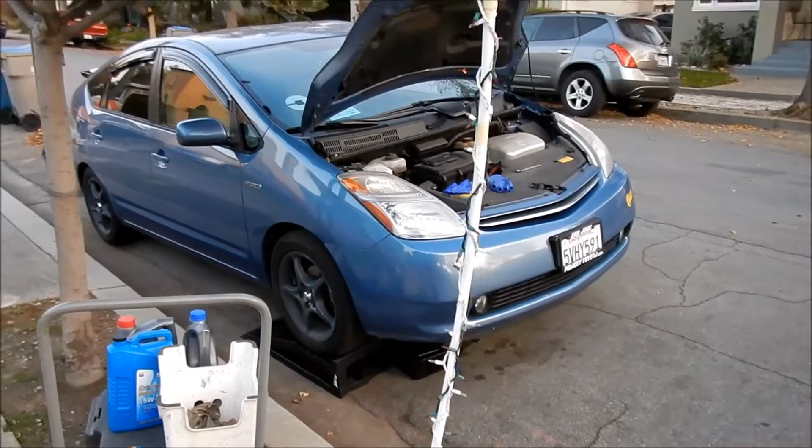Alright, HadesOmega here, and I'm doing a video on how to clean your K&N cabin filter. It's a little different than the air filter. The air filter is right there in the front, but I'll show you how to do it on the 2nd gen Prius right here. It's pretty much the same for all the cars, so long as you can get the filter out.

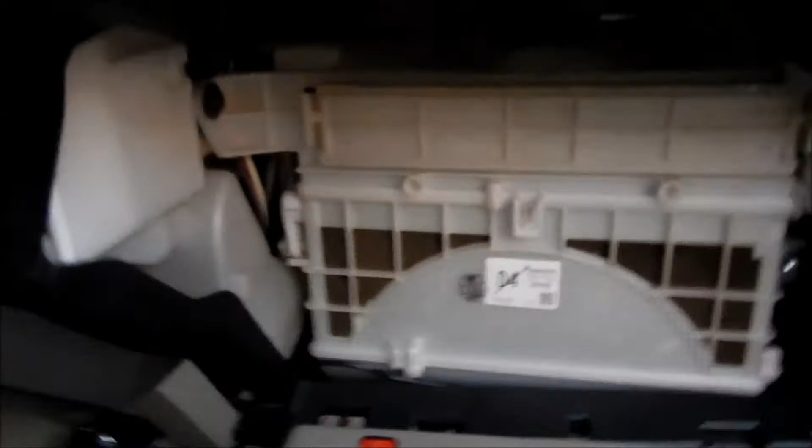So the first step is to take the filter out. Taking the cabin filter out on a Prius is quite easy. Just get on the passenger side, open the glove box, and there's some little tabs here. Squeeze the glove box inward, and then there's a little dampener rod, hard to see. You just pull that out, easy, and it comes out. You might want to take some of your stuff out of the glove box, like this big book here, and that gives you access to the little filter assembly.

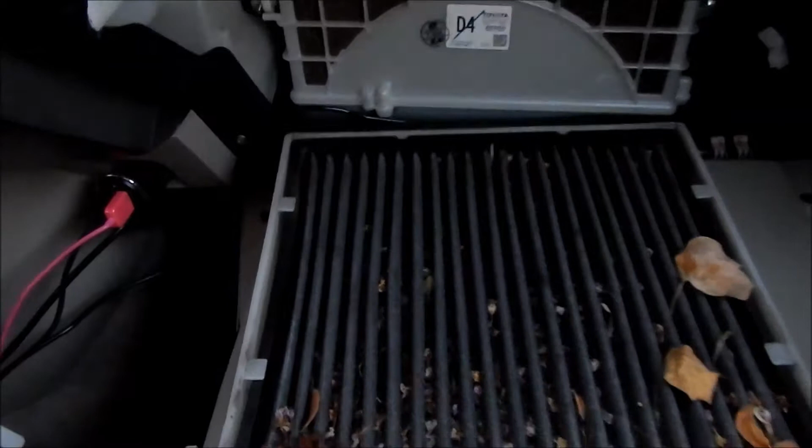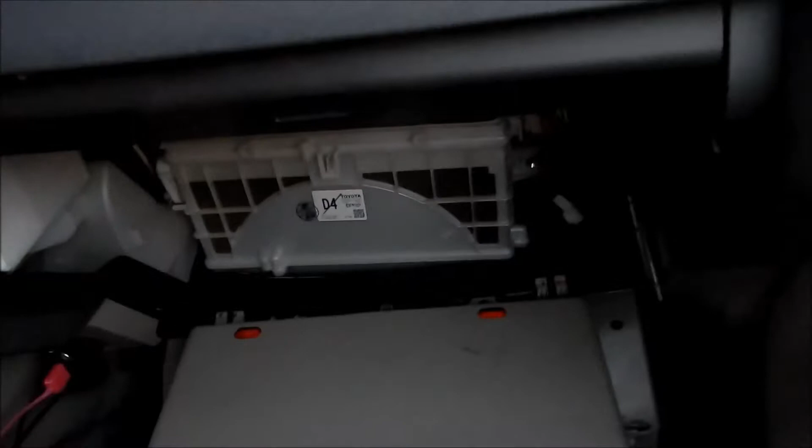So take it out and marvel at how dirty your cabin filter is. My car is parked on the street, and it's fall time right now, so there's a lot of leaves and stuff. Let me just go ahead and put this back up a little bit.

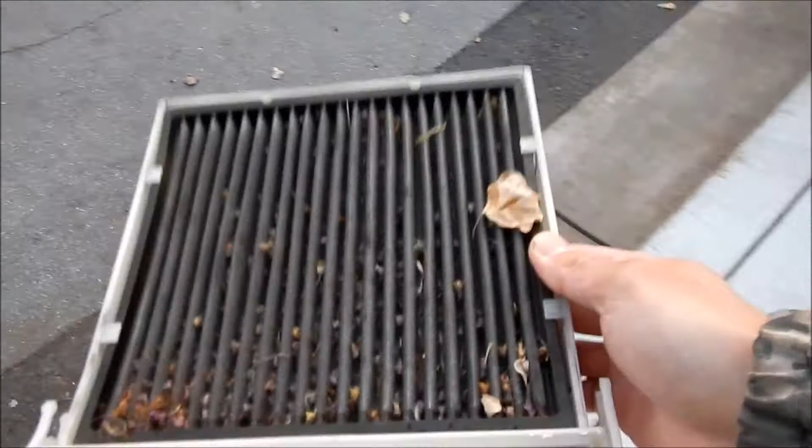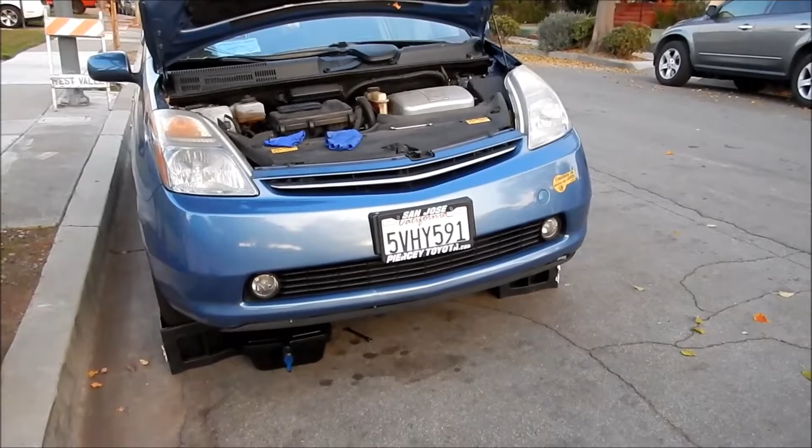Take your filter out. Alright, so what I've opted to do is, you should clean these every 10,000 miles, or inspect them every time you do your oil change. I change the oil every 5,000 miles on this car, so I do this every 2 oil changes. I'm going to clean the filter. As you can see, it's pretty filthy right now, pretty gross.

So what you want to do first in cleaning it is dislodge any foreign objects embedded into it, like these leaves and stuff. Let's put it on this pile of leaves here. A good thing to do when you get the big stuff out is to just tap it. Yeah, so you see how much stuff comes out of there? You're already doing a pretty good job cleaning it. It's just dust, so if you're in a garage you probably don't want to do that, but here in the open world, it can go wherever it wants.

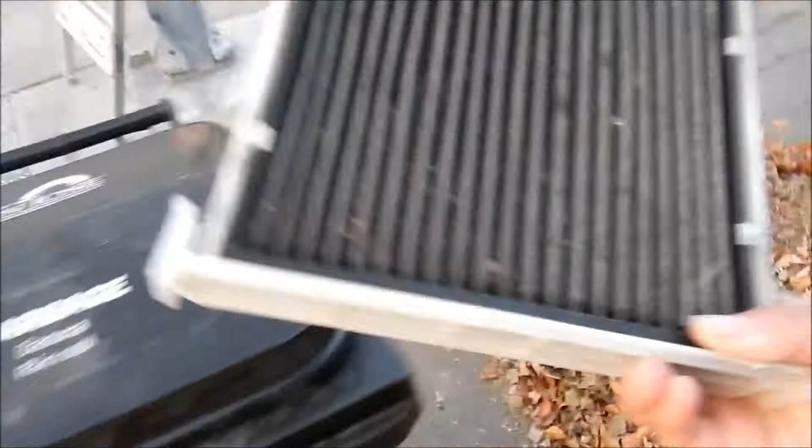Okay, so we got the majority of the dirt out. To take the filter out, you basically gotta squeeze the filter so it comes out from these tangs here. Like that. Boom, slide it out.

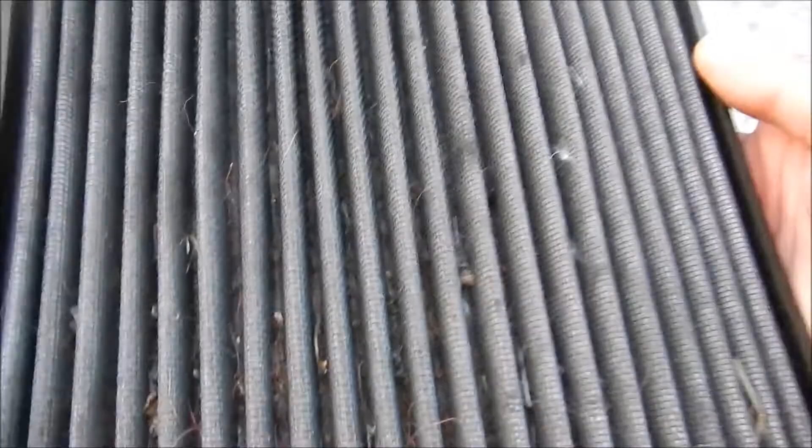You may want to take note which side is the part on top and the part on bottom. What I might do is get a silver pen, though obviously you can tell which side is top and bottom. The top part was the dirty part, so it's dirty on top, meaning the dirty air comes in from the top and goes to the bottom, gets sucked through the top, and the bottom part is clean. As you can see, the K&N filter has been doing a good job of filtering that stuff out, and I'm glad for that. I don't want to be inhaling all that crap.

So yeah, there it is. You've taken it out of the little tray. You may want to wipe the dust off of the tray - you can see some of it's getting around it. Just take note which one is the top and the bottom.

What I'm going to do is get a silver marker and mark it up somewhere. I'm pretty sure you can flip it around, and I think when you install it, it doesn't matter what side you do it, but figure out which one is the top and bottom so you install it the same way every time. But it doesn't really make much of a difference.

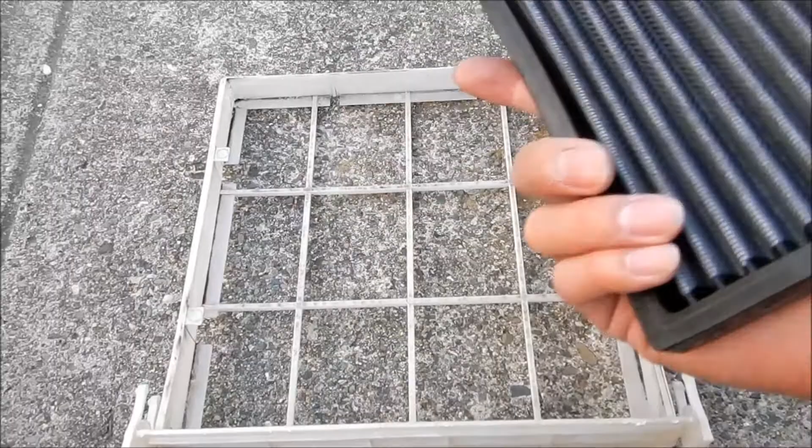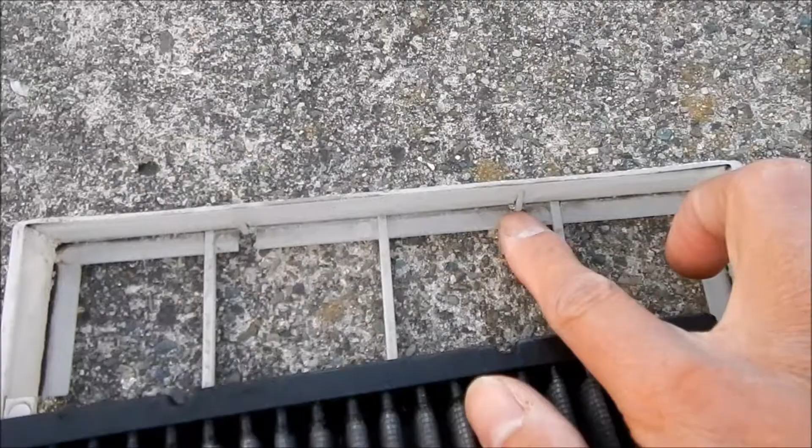But when you install it again, just take note of these little marks here, these indentations they made. They're made so they clear these here, so it's pretty dummy proof. You can't install this wrong as long as you match that up. So just go ahead and keep on banging that on something.

Get that dirt out. Just flop it around. Try not to hit it too hard, you may bend it.

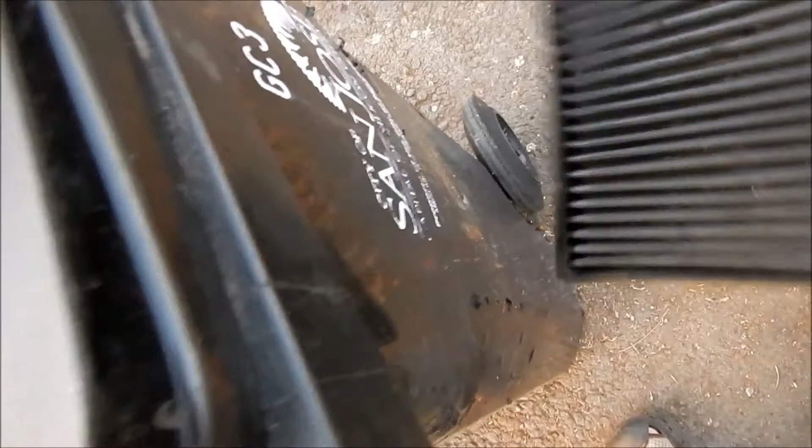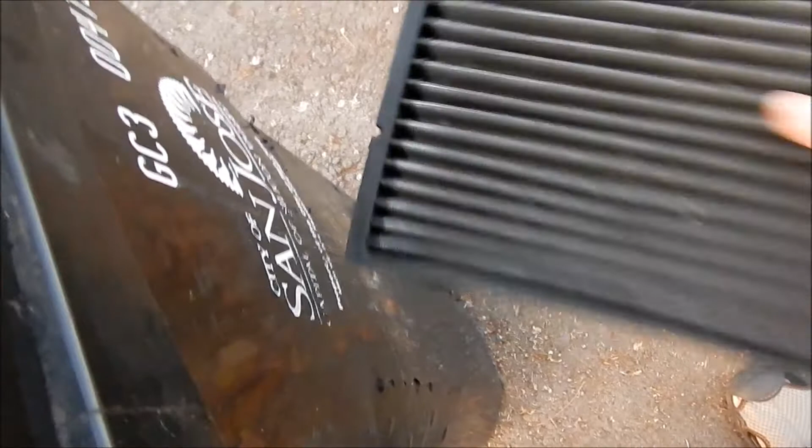That is really dirty, way dirtier than the air filter, I'll tell you that. We'll take a look at the air filter in a minute. So I've opted to clean the cabin filter at the same time I clean the air filter. That's a quick way to get some dirt off of it. And then we're gonna use the K&N.

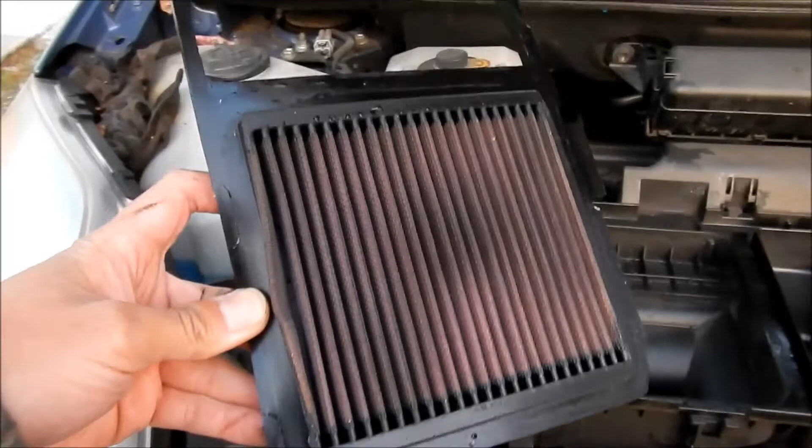I'll be cleaning this at the same time, but I have a K&N engine air filter, and you can see it's not nearly as dirty as this guy here. So yeah, that cabin filter needs a lot of attention.

Okay, HadesOmega here. I apologize, it's getting dark pretty fast. It's wintertime, so I'm trying to knock out the cleaning part before it gets too dark.

So here's the filter that we took out, and I did a pretty good job dislodging all the loose stuff in there. There's like a feather in here.

So here's the stuff that you use to clean it with. You don't use the regular K&N air filter cleaning stuff. There's an actual kit for the K&N cabin filter. It's called a refresher kit, washable cabin - it's a K&N refresher kit for washable cabin air filters. So there you go, this is a washable cabin air filter.

I got it on Amazon. I haven't seen these in any auto parts stores, so Amazon has them, and I think they were around 20 bucks. But I'll put a subtitle below right now with how much I paid for it. The price probably fluctuates.

So it looks like it's pretty easy. Basically, you spray on the cleaner, rinse the filter, and then apply the refresher. It's pretty much the same steps as cleaning the K&N air filter.

Yeah, so let's see what's in the box. The part number for this is pound 99-6000. It says it's a 10-year warranty and 100,000 miles. They stand by their products.

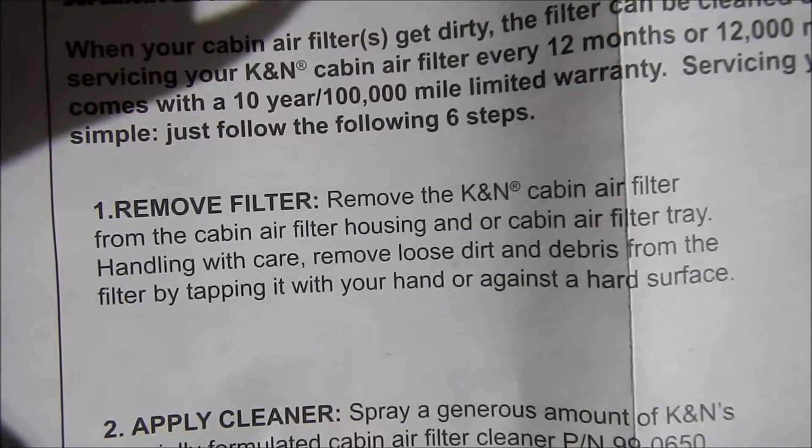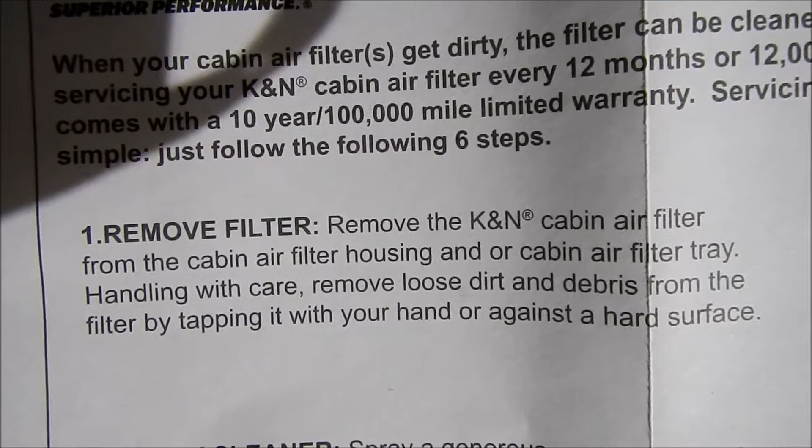The first step, which we already did, is to remove the K&N cabin air filter from the cabin air filter housing and/or cabin air filter tray. We've already done that. There it is. Handling with care, remove loose dirt and debris from the filter by tapping it with your hand or against a hard surface. I used the garbage can as the hard surface.

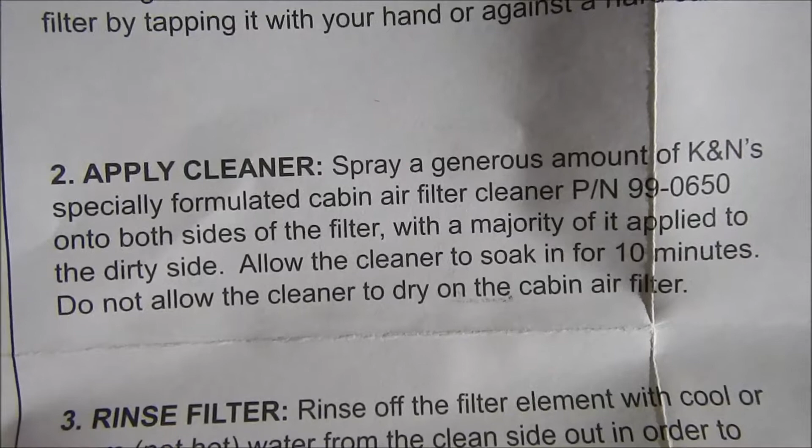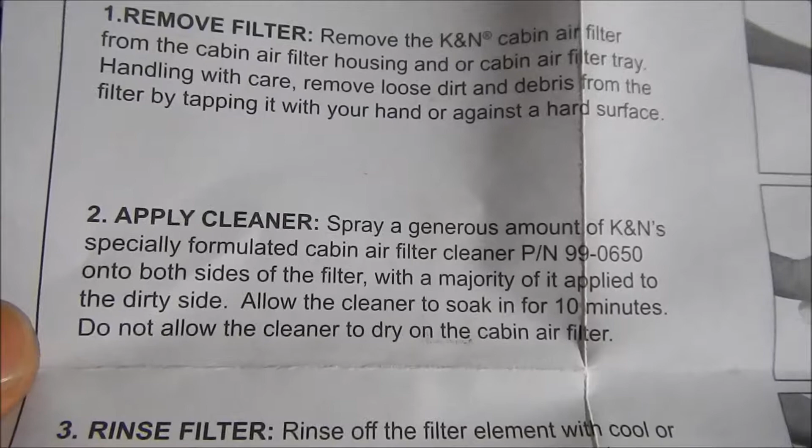Then we applied the cleaner. It's fairly clean now, so I don't think you need to clean it anymore. We spray a generous amount of K&N's specially formulated cabin air filter cleaner, part number 99-0650. It's good to know that part number in case you still have a lot of refresher left and just need to buy more cleaner once you run out. They say to use ample amounts, which is why the cleaner bottle is much bigger, onto both sides of the filter with a majority applied to the dirty side.

Allow the cleaner to soak in for 10 minutes. Do not allow the cleaner to dry on the cabin air filter.

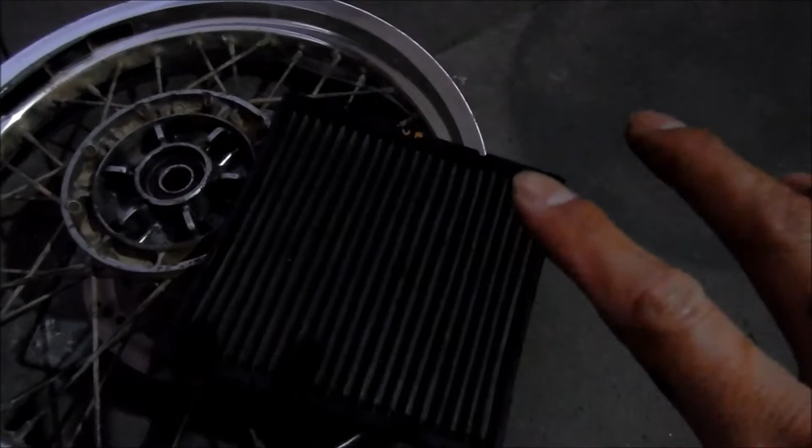So we're going to spray it. For demonstration purposes, I'm just going to leave it on this wheel here. This is actually what I use to dry my filters, an old motorcycle wheel. This one is all bent up and busted up, so it doesn't matter if it gets all messed up. So there's the filter, I laid it onto there. Let's get our cleaner, let me shake it a little bit. I don't think you have to, but it's probably just soap in the bottle. All right, and then just spray it.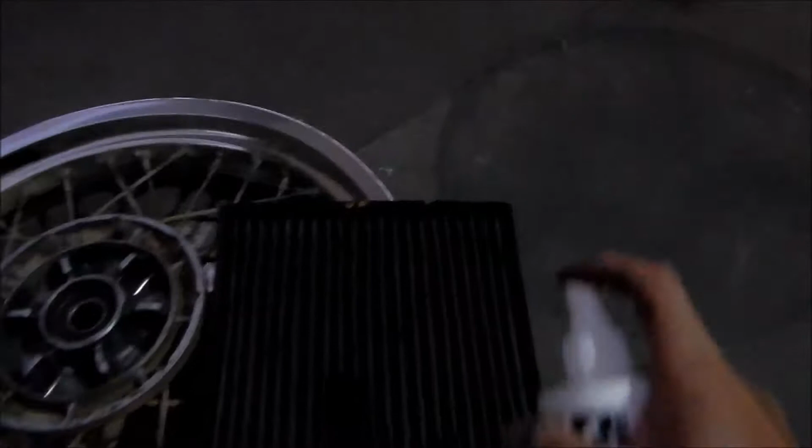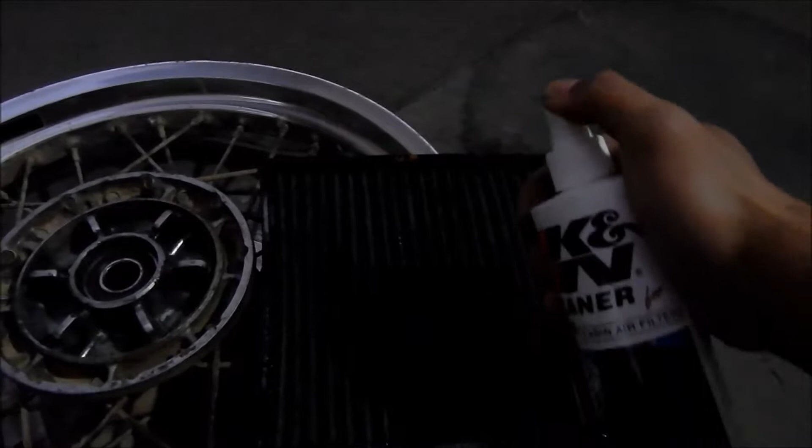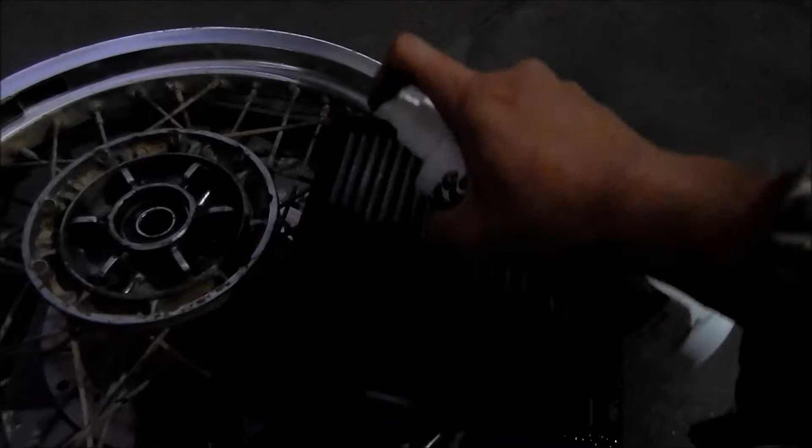They say the side that's dirty is the one you want to spray the most on. Just make sure you make it look wet. It's pretty cold today, so I don't think it will dry so fast. It's not very dry today. Okay, that looks like enough, and I'm going to turn it over and do the other side. Not so much on this side, just wet it. Make sure you get all the pleats and everything. Just go through it in a little methodical pattern. The spray bottle is kind of hard to use. Okay, and then just leave it there for 10 minutes.

It's 17:10 right now, so at 17:20 we'll come back and rinse it.

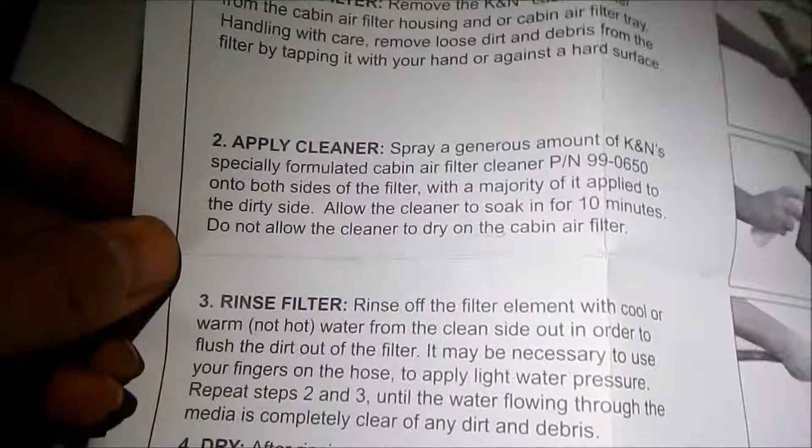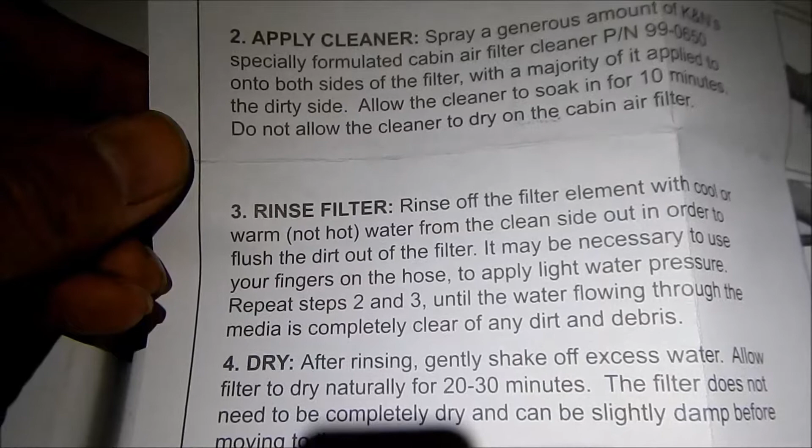Okay, so we're on step 3, rinse filter. Rinse off the filter element with cool or warm, not hot, water from the clean side out, in order to flush the dirt out of the filter. So you flush it from the clean side to the dirty side. It may be necessary to use your fingers on the hose to apply light water pressure. Repeat steps 2 and 3 until the water flowing through the media is completely clear of any dirt and debris.

Okay, it's been 10 minutes, so it's time to go rinse it. We're going to get a garden hose and spray it. What you want to do first is spray it from the clean side to the dirty side first, that way it forces the dirt out the dirty side. So here we go.

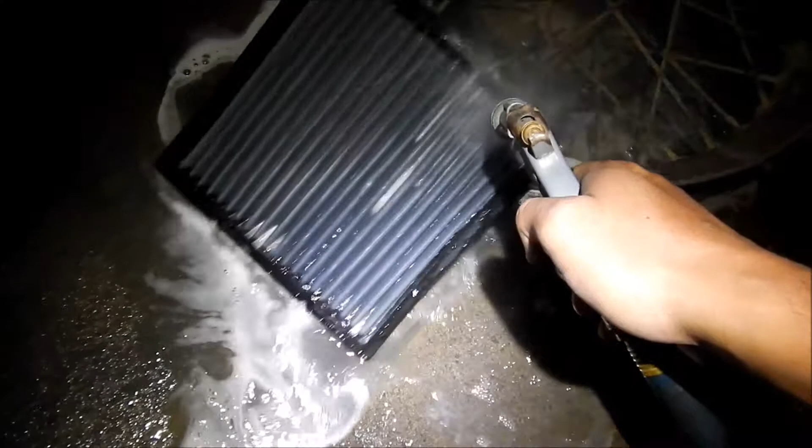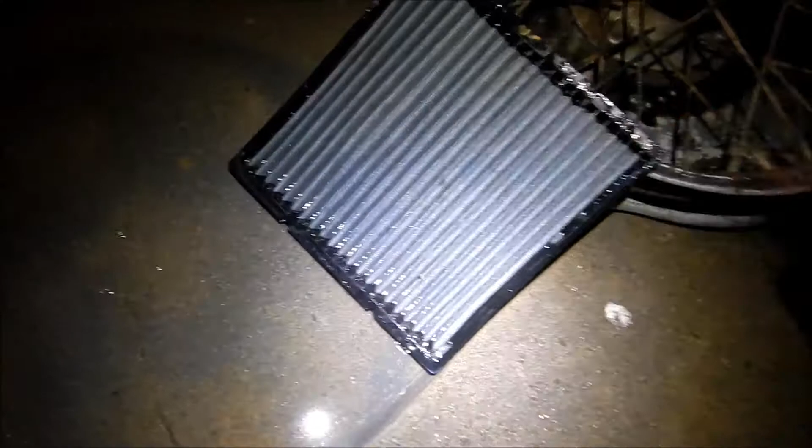Okay, flip it over and marvel at how clean it is now. It's still a little dirty, but let's keep on doing it. Keep on rinsing it if it still looks dirty. Try to really get into the pleats and let the water pressure do the work.

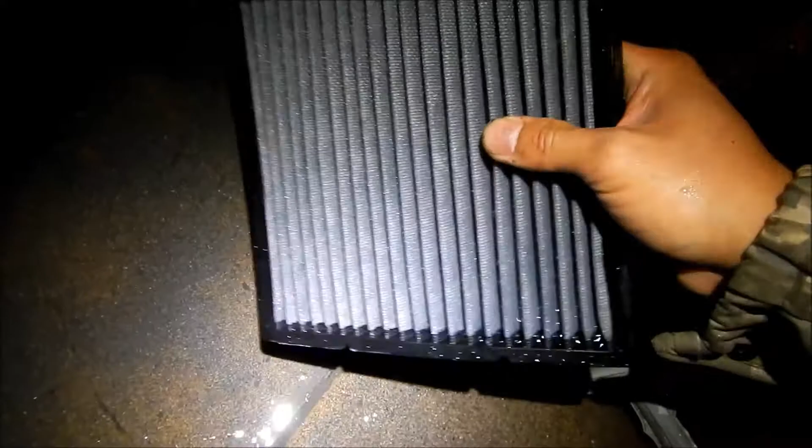There it is, looks pretty clean. So all we have to do is rinse this side one more time. And look at that—remember how dirty it was before? It's not so dirty anymore.

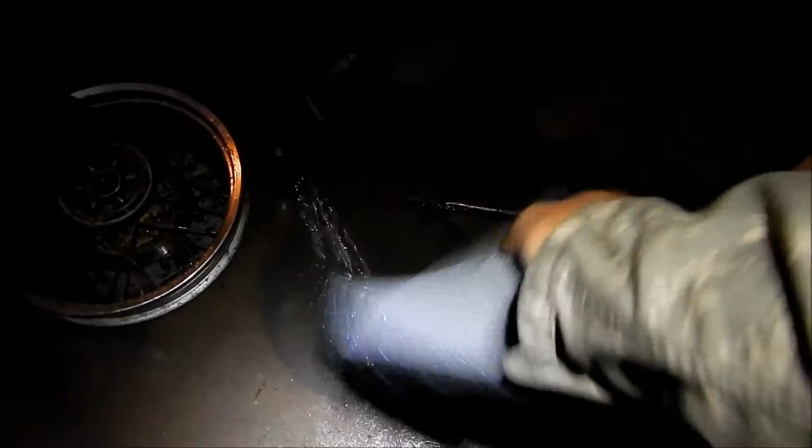It's brand new. Now all you have to do is dry it. Just shake off as much of the water as you can. What I don't like about cleaning these K&N filters is that you can't drive your car for the rest of the day—you have to wait for this to dry. The best way to dry these, I think, is to just leave it in the car on a hot day and it'll dry right away.

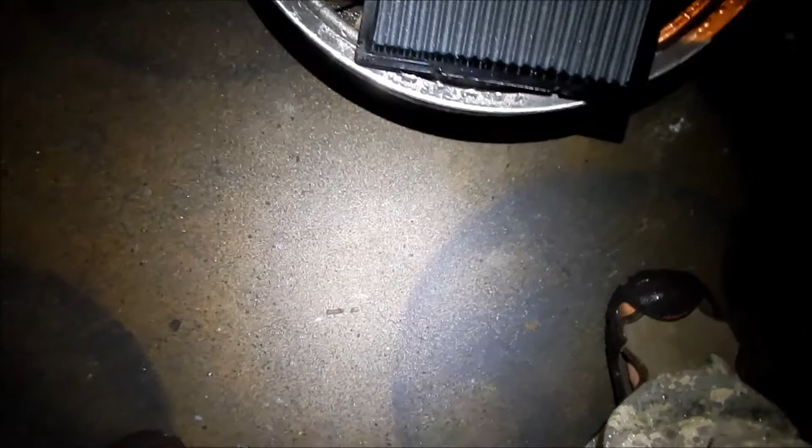But you should really let it naturally air dry. That's what I like to do—tap all the water off, then leave it on this wheel here to dry. I'm probably just gonna leave it overnight, not drive the car the rest of the day. Then I can clean my air filter.

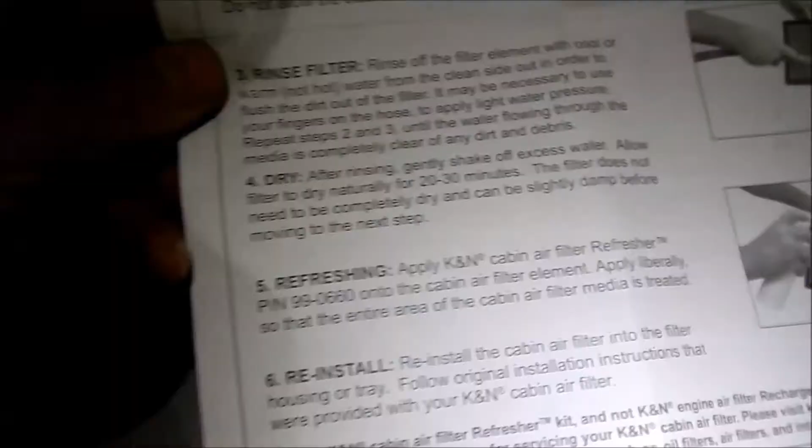Okay, step 4: dry. After rinsing, gently shake off excess water. Allow the filter to dry naturally for 20 to 30 minutes. The filter does not need to be completely dry and can be slightly damp before moving to the next step.

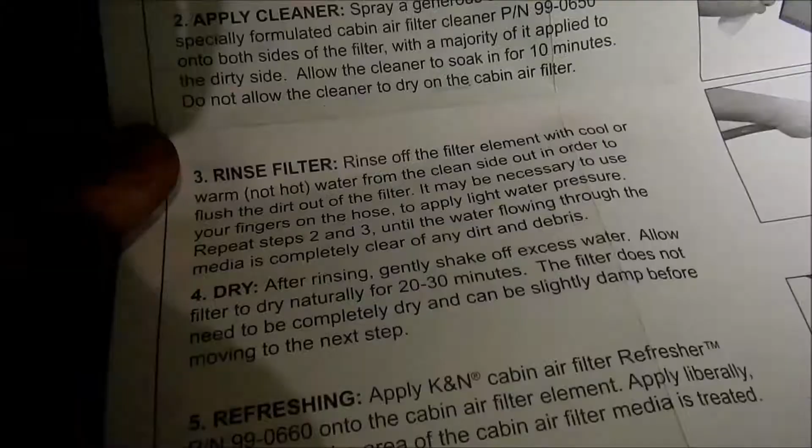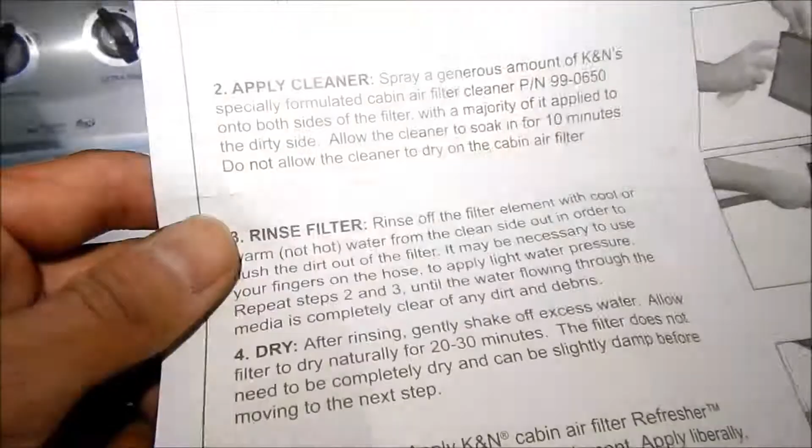Personally, I wait till it's completely dry. So I'm just gonna let it sit overnight until it's dry. Maybe I'll take it inside the house where it's warmer—it's cold today, so it's gonna take a long time to dry. On a warm, dry day, it'll be okay.

Since we're still cleaning it, one thing to do before you put the filter back in is to clean the tray. The tray can collect some dust, so just get a wet napkin or a piece of cloth, wet it down, and wipe all the dust off.

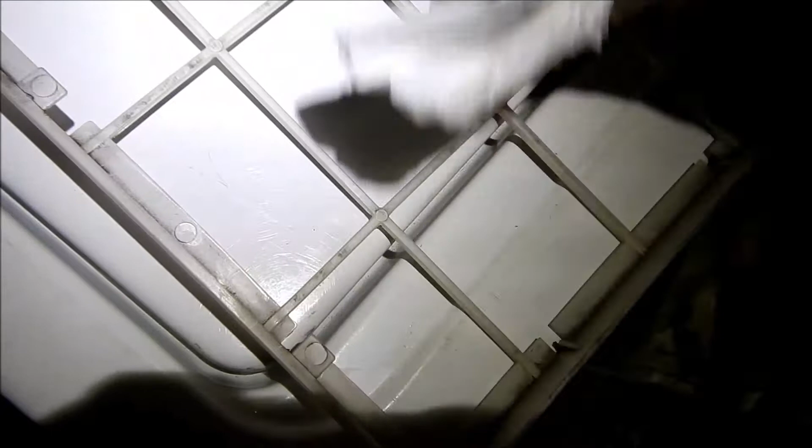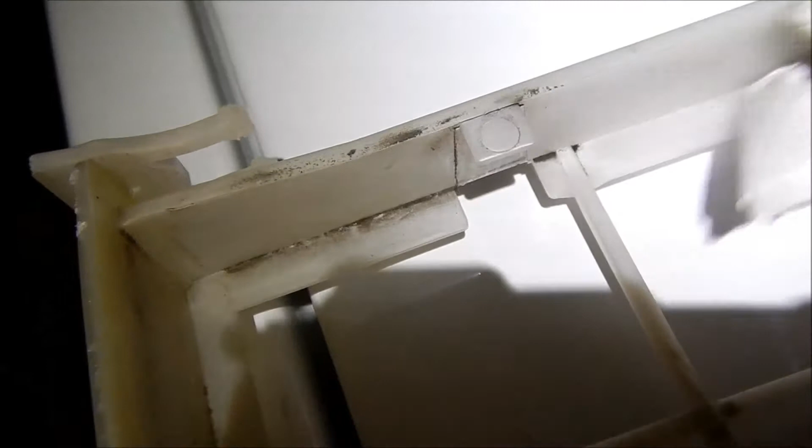Just wipe the little skeleton here, the cage—see, it's nice and clean now. You want to get this around the edges here. Maybe get a screwdriver so you can clean the edges. See how much cleaner that is now.

Just keep doing that for the rest of the filter tray, and then let everything dry. Okay, HadesOmega here.

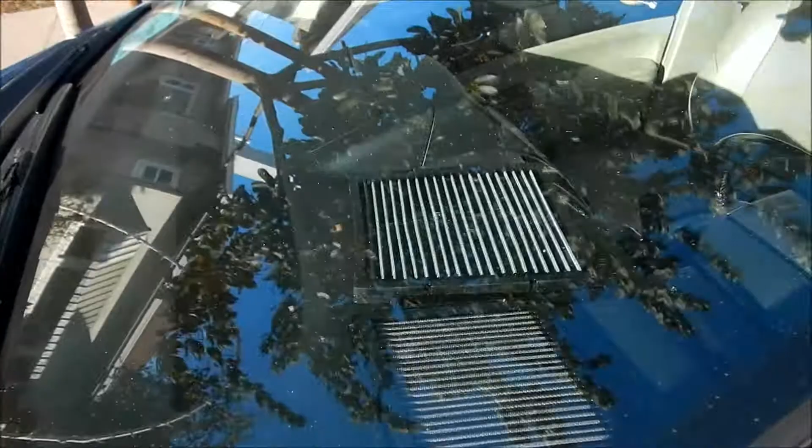It's the next day. The filters are in my garage and it was pretty cold, so they're not super dry—they're really cold. The best way I've seen to dry the filters is to put them in the car and let the sun dry them, because the car turns into a bit of an oven. So that's a good way to dry the filters—just leave them in the car and let the sun dry it. That's what I've done.

And then we'll put it in. All that's left to do is oil the new filter, or put the refresher on the cabin filter. But I'm cleaning the air filter at the same time, so it's a 2-in-1 deal—get two things done for one, right?

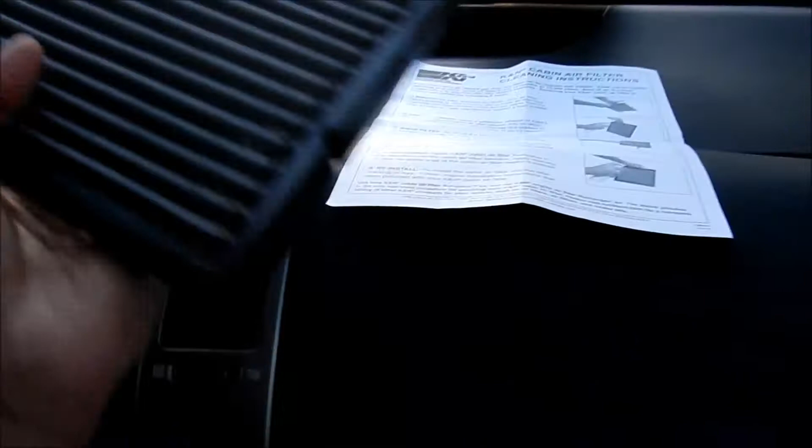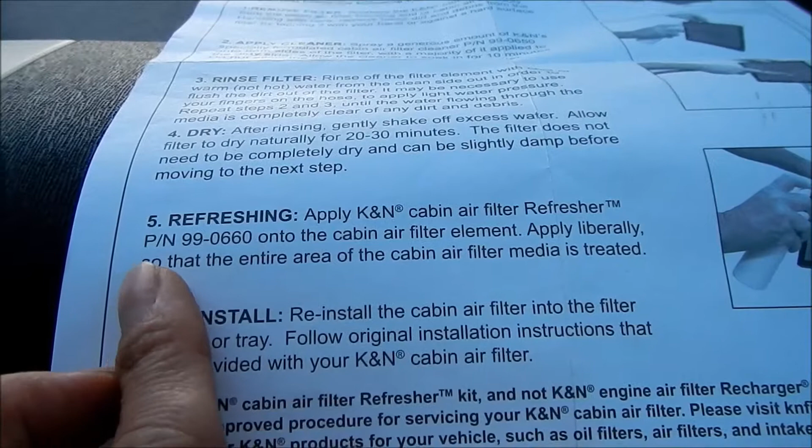Okay, our filter is nice and dry now, so we're gonna put it back in. The next step, after drying, is to refresh it. Apply K&N Cabin Air Filter Refresher, part number 99-0660, onto the cabin air filter element. Apply liberally so the entire area of the cabin filter media is treated—pretty much just spray it, both sides, until it's pretty wet.

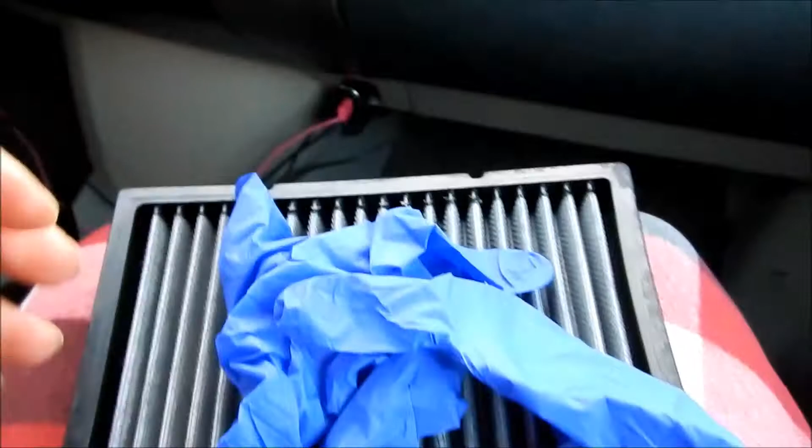I've never used this stuff before, so I'm gonna wear gloves. For the engine air filter, I definitely wear gloves because that oil is pretty nasty to get on your skin. Got my gloves on, and we're gonna go.

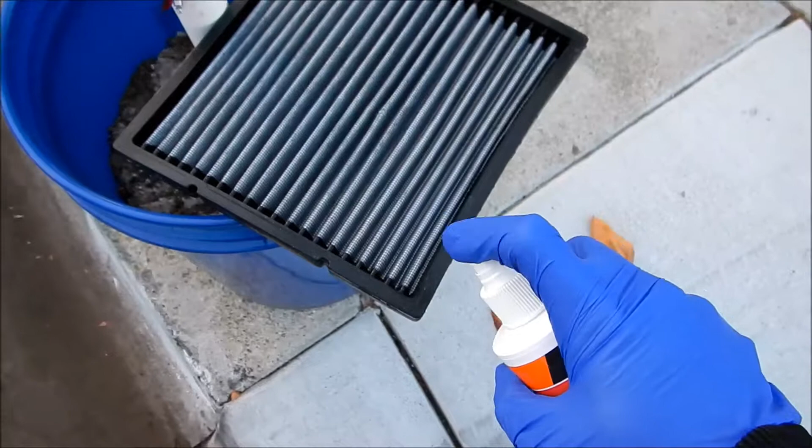I don't know if you have to shake this or anything, but I'll give it a little shake. What I'm gonna do is put it on, just so you guys can see—I'm holding the camera. Put it on one of these buckets here, and then we'll spray away so you can see what the refresher stuff looks like.

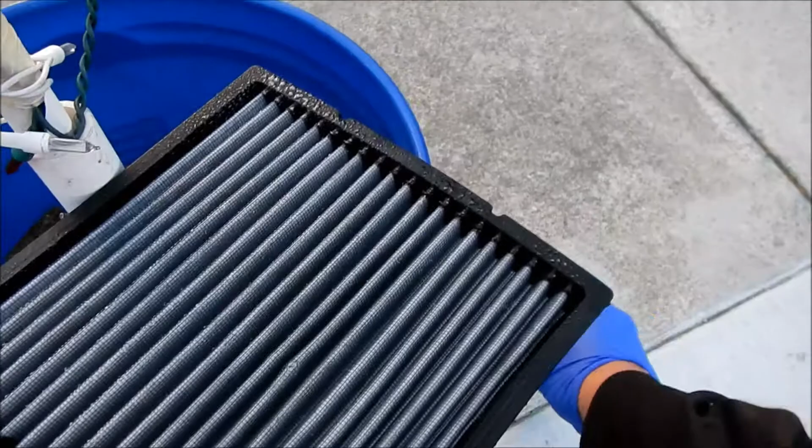Pretty much how you spray the filter—it's pretty much how you sprayed the cleaning solution on, same way. So I think this is the dirty side. Oh yeah, okay, it says up there, so you can faintly see it.

It says to liberally spray it. I think if you give a good spray for both sides, that should do it. It's not good to put too much, but I know this isn't really an oil. I don't really know what it is.

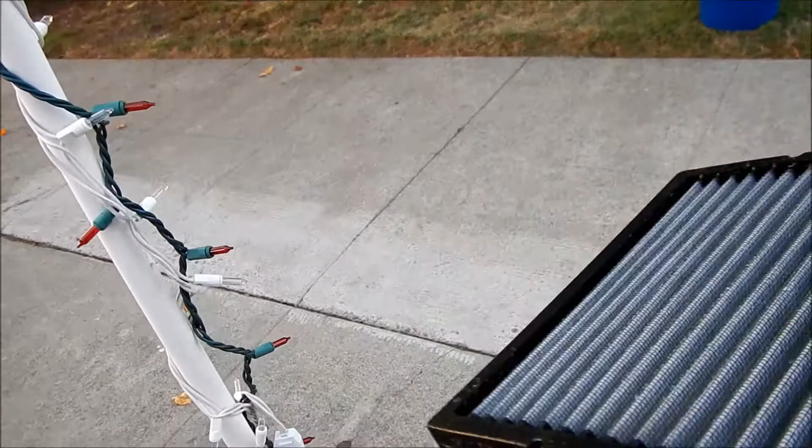Yeah, it doesn't seem like an oil. I have no idea what this is. It's not an oil, it's a liquid of some sorts. All right, so there it is. I can tell you what it smells like. It kind of smells like some kind of rubber or plastic.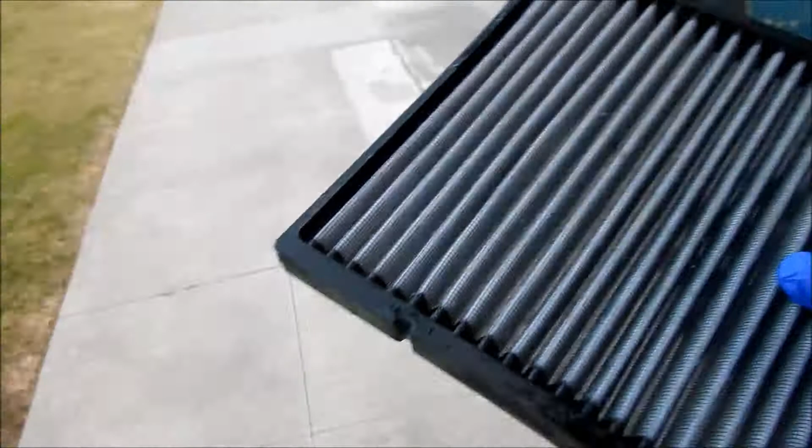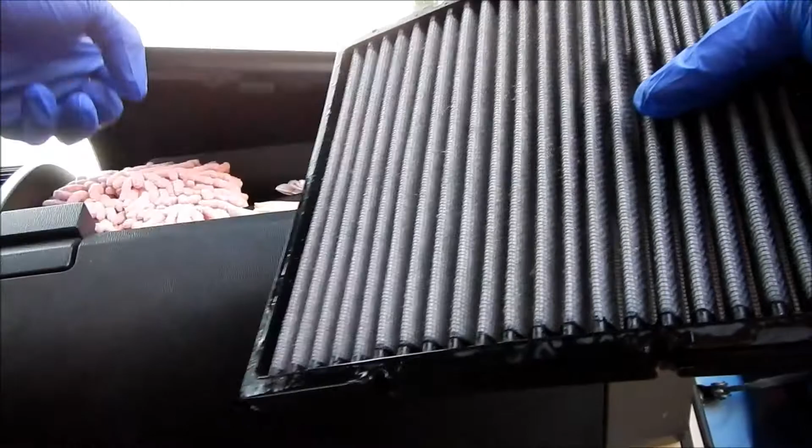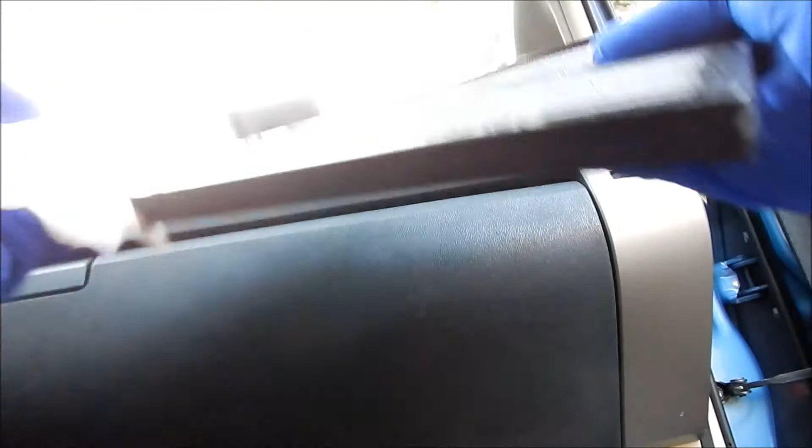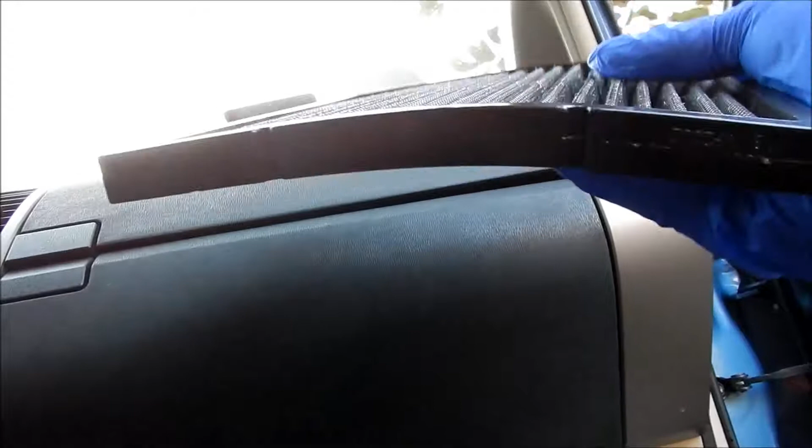So one good thing to do is wipe the excess stuff off. I'll go and do that real quick. I got a napkin here. Hopefully you guys can see this, but I'm just gonna wipe the edges of the cabin filter dry so there's not too much excess. That should do it, and then go ahead and put it on the tray.

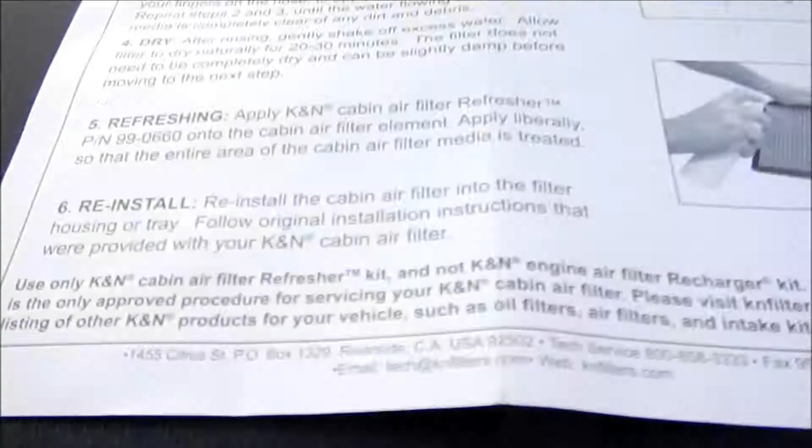Next is the reinstall part. That's pretty easy. Let's just read it real quick. So it's number 6, reinstall. Reinstall the cabin air filter into the filter housing or tray. Follow the original installation instructions that were provided with your K&N cabin filter.

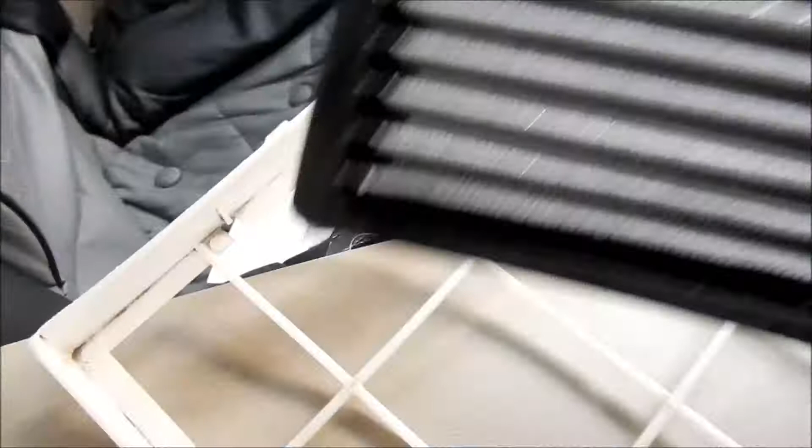It's pretty easy. So you got to put it back on the little tray here. Are these up? This is the up portion. So basically it doesn't matter which way you put it, but there is a certain way to install this. On the Prius, there's these little notches here, and you line the notches up with these little tangs here.

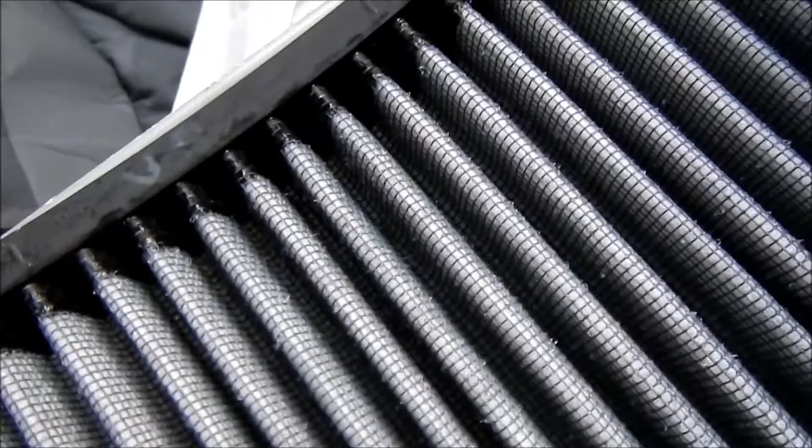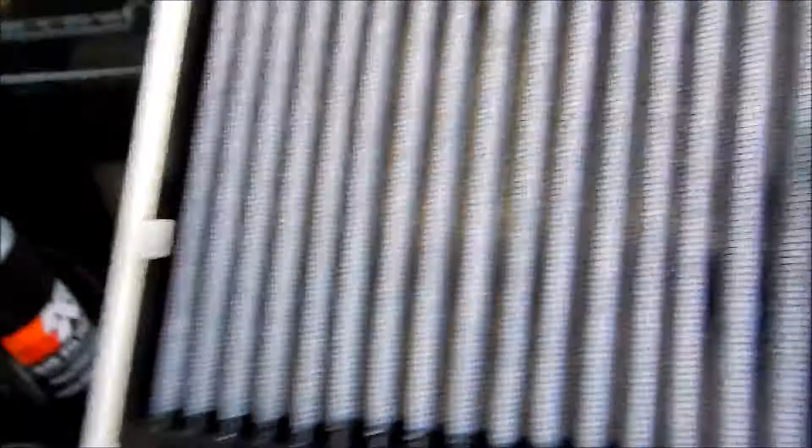Kind of like that. Just put it in there, and then you kind of have to distort the tray a little bit so it'll fit in there. Just try to get it in there somehow. Just put this one back. So it is quite a bit more work than just buying a new cabin filter, but these cabin filters aren't cheap. So there it is, it's on the tray and it's ready to put back in.

Go ahead and open up. If you close the glove box, go ahead and undo it again. Let's take everything out. Did I put everything back? Where's the lid? Oh yeah, this is the lid. Duh. All right, slide it back in there.

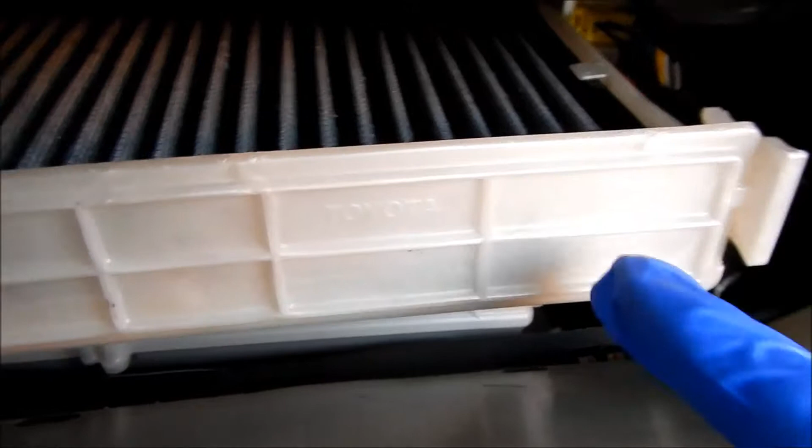On the Prius, there's a little arrow here that says up, and it says Toyota here. So you just want to make sure you put everything back the way it's supposed to be. You can read the Toyota logo, it says up, and it says Denso here. If it was upside down, the Toyota would be upside down. Boom, there it is. Slide it in, and make sure you hook it up on this thing again. Press on the left and press on the right, and there it is. It's installed, good to go.

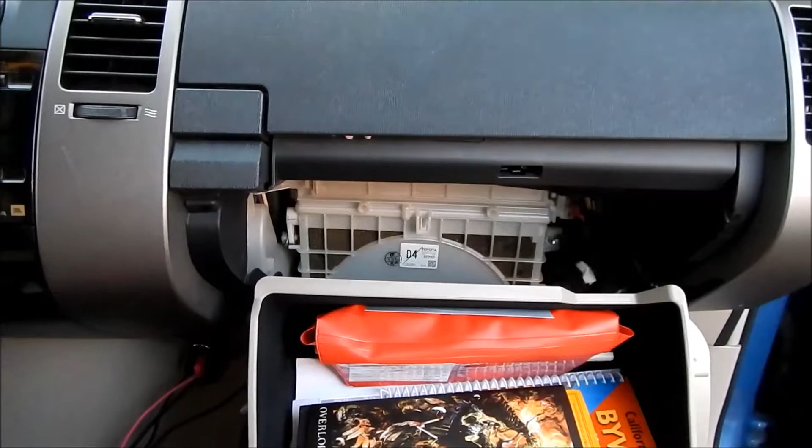So that is how... oh yeah, and then obviously you want to put your car back together. So go ahead and put the little dampener rod back in, and then squeeze the glove box so it'll go in again. There you go.

Install complete. So that's how you do it on a second gen Toyota Prius, that's a 2004 to 2009 Toyota Prius, the second gen. As long as you know how to do it on your specific model car, it's pretty much the same process for all of them.

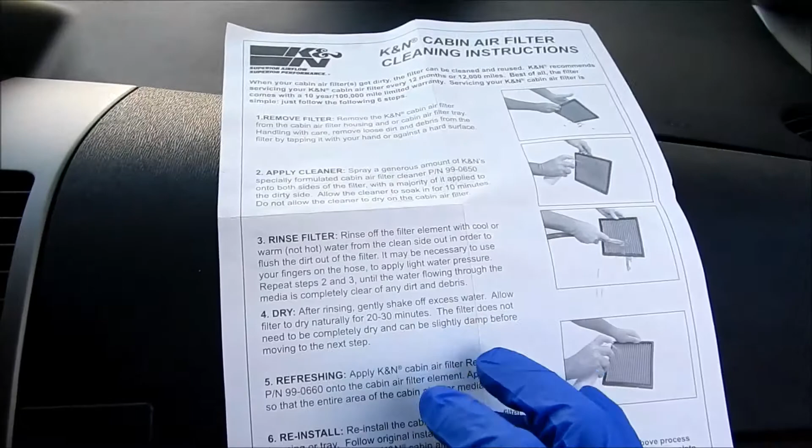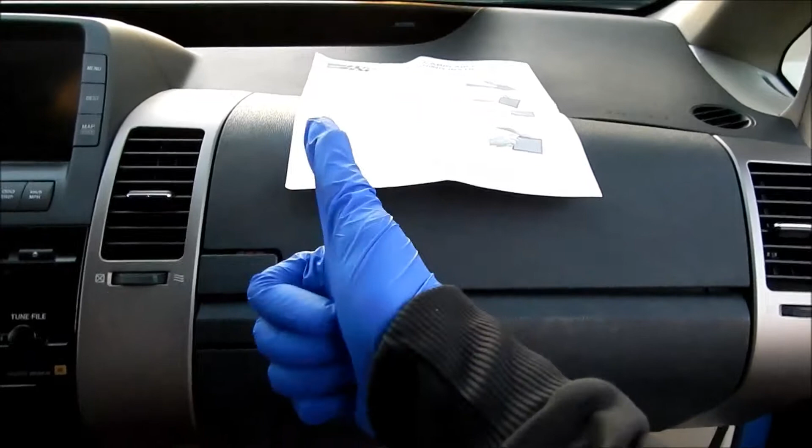How to clean it, anyways, it's very similar to cleaning that thing, except you don't use this oil. You use the spray stuff, the refresher, because I guess you don't want that nasty oil blowing around in the cabin. So there you go, that's how you do it. HadesOmega out, hope you learned something.

Like I said, it's a good idea to get a reusable cabin filter. You saw how dirty it was. I should probably clean it more often, you know. Depending on where you live, you probably want to clean it more often. It's good to keep contaminants out of the air, and especially it's good to have around allergy season, because it captures all the pollen.

And like I said, the cabin filters aren't cheap. They're probably around 20 bucks or more to put a new cabin filter in, when you can just keep on cleaning it. It should supposedly last the life of the car. All right, K&N, good stuff. HadesOmega out.